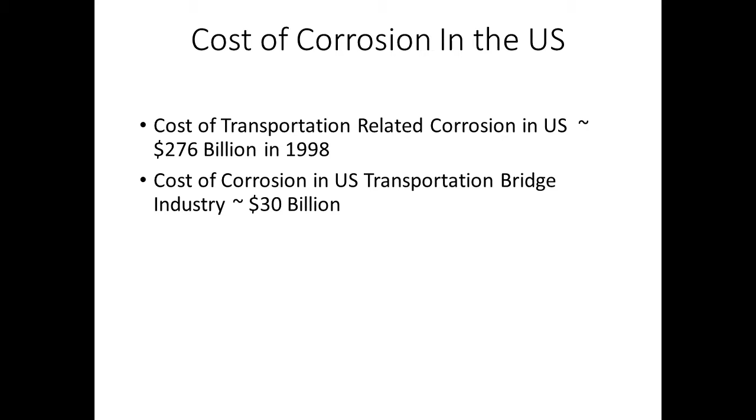It's something that all DOTs have to deal with. It's something that we in this room have to deal with all the time when it comes to preservation and bridge preservation in general. When we sat down for this scan, we had to get a scope.

We all met in DC preliminary to sit down and discuss what we wanted to get out of the scan. Basically, part of it was to determine the amount of funding the agencies could get, evaluate the practices we use for bridges, for in-situ coatings, what type of surface preparation we're going to be doing or recommending, coating option decision-making, use of performance-based contracts, performance evaluation, and overcoat and replacement of coatings. We went on and on about what we were going to do in this domestic scan.

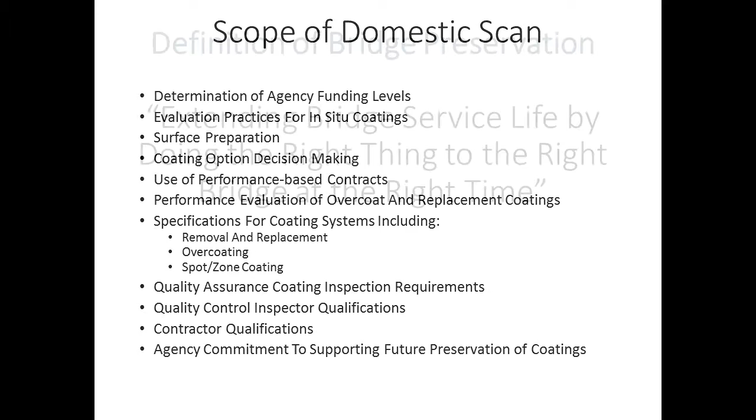These are the areas we covered: quality assurance, quality control, contractor qualifications, and agency commitment to supporting future preservation of coatings. When we talk about bridge preservation, the definition is extending a bridge's service life by doing the right thing at the right time.

In a lot of situations you'll have a bridge that might be 15 or 20 years out before you do a redeck. It could be 30, 40, 50 years out before you're doing any major maintenance, but we have a corrosion issue. So what are we going to do to maintain that structure? Part of the scan was to determine what the best practices are.

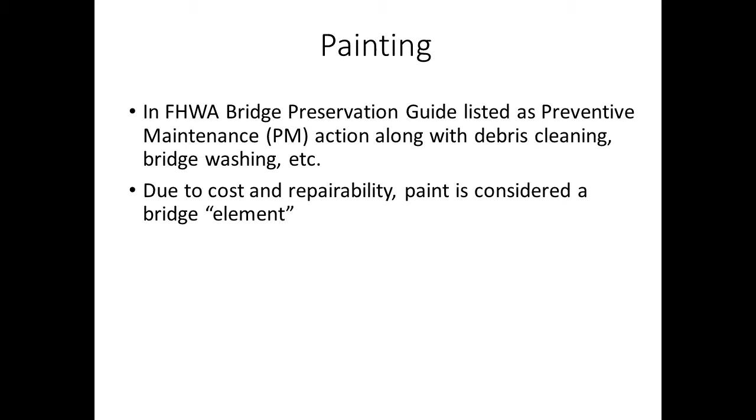When we talk about paint or coatings, in the Federal Highway Bridge Preservation Guide, it's listed as a preventive maintenance action, along with things like debris cleaning and bridge washing. But due to the cost and repairability, paint was considered a bridge element.

When we sat down with all these folks at this meeting, 11 state highway agencies had preventive maintenance programs. Six owners had steel bridge preservation programs, and they use life cycle costs for effective coating decisions.

The other issue was dedicated funding for bridge painting. How is it done? Do they have a set program? Do they have a set amount of money? Do you just put out money when you need to? When we talked about dedicated funding, the whole idea is that to have an effective program, you need to have dedicated funding.

We talked about inventory and structure condition and other specific attributes. When we started talking about evaluation practices, a lot of DOTs did different types of evaluations of the coatings in the field, but mostly they all followed and made maintenance painting decisions based on the NBIS.

This was done under two-year, biannual in-service bridge safety inspections, and coating assessment tools they would use included the SSPC Viz guides, custom photographs, tensile adhesion testers, and thickness gauges. There are a lot of different things in the arsenal that they use to evaluate bridge practice for the coatings that are out in the field.

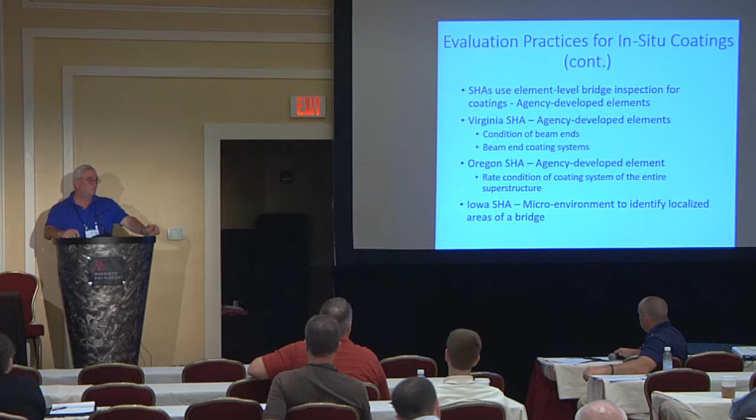For the most part, when we talk about coatings and structural steel, specifically for bridges, when you look at a situation like corrosion, what is the best method for cleaning the structural steel and making sure it's set up and ready to have a coating applied to it.

Most of the state highways specify SP10, which is a total removal, blast clean to a near white. Surface preparation varied a lot for spot cleaning and painting. In that situation, you could use hand tool or power tool cleaning, all the way up to spot abrasive blast cleaning. Most of the SHAs utilize the SSPC Guide 6 for containment. It's a very handy guide for all the DOTs to use regarding the containment systems to collect waste during abrasive blasting or hand tool, power tool cleaning.

The other thing that was noted and real interesting is a lot of state highways are moving away from overcoating work. When you start talking about overcoating an existing coating, a lot of them are getting away from it because the sheer cost of putting up containments for structures to do overcoat work is over half the price of what the job costs. So they're finding that if you do a complete blast or complete removal and paint versus an overcoat, there's not a big difference in price. So a lot of DOTs are getting away from overcoating work.

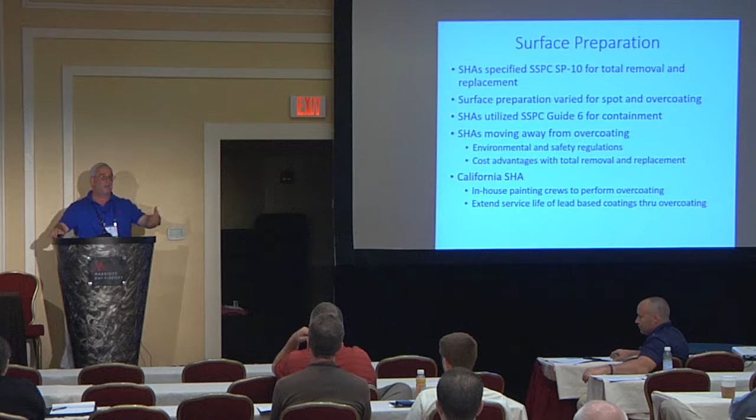But they do some overcoating because they want to extend the life of the lead coating that was applied many, many years ago. Some of you may not understand that lead is the best corrosion inhibitor out there, the next best would be zinc coating. So instead of removing all the lead, they want to try and keep it on. I thought that was quite interesting.

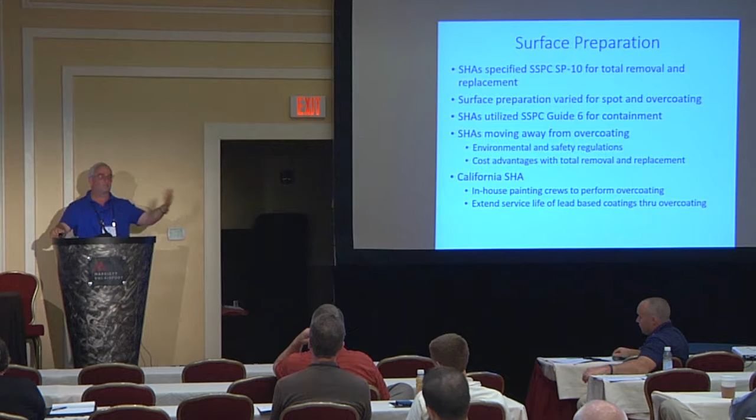Oregon uses an ultra-high pressure wash to remove pack rust. Specifically, they use this process to remove pack rust between plates. You have this especially with built-up members, bridges that have truss connections, where you get a lot of heavy pack rust and the steel starts pulling apart. They use high pressure water to remove all that pack rust, and then they coat it to keep it from having any further delamination.

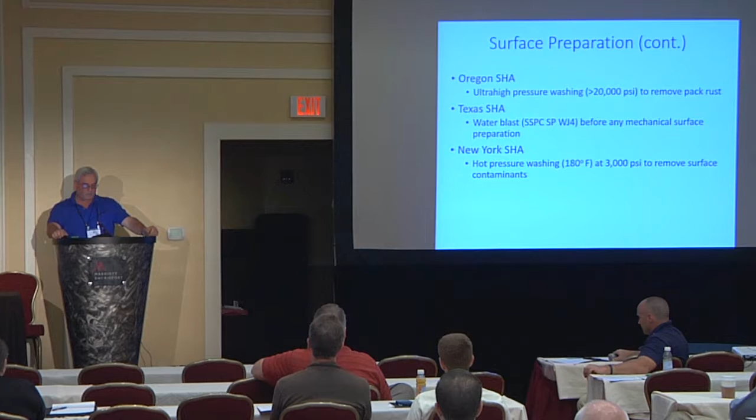Texas was using water blasting before any mechanical surface preparation was done, and they had some success with it. New York uses hot pressure washing to remove surface contaminants.

So during the domestic scan, we talked about coating options and decision making. Everybody in this room has decisions to make when it comes to their structural coatings - what they're going to want to do to protect the steel, how we're going to get the work done, and also how we're going to pay for it.

Total removal and replacement was seen to be the best. It gave us the most longevity, anywhere from 15 to 30 years, depending on the structure and its location. For overcoat, we were looking at somewhere between 10 and 20 years.

We were also looking at high performance coatings and systems out there. We have a lack of historical data on these high performance coating systems. There's a lot of new coatings coming out on the market - high build polyurethanes, and all different types of coatings, with people touting them as the best, the next best thing to use on your bridge that will last 20, 30 years. The problem is we have no historical data on any of those, so it's kind of a wait-and-see situation.

Most folks out there have seen and used 3-coat zinc epoxy urethane coatings for 30, 40, 50 years, and they have longevity and a track record. So a lot of people have decided that's the way to go. Then we talk about testing high performance, ultra weatherable coatings - using modified weathering, accelerated weathering testing, outdoor exposure, and different top coat colors. That was one thing brought up at the domestic scan - top coat colors and fading.

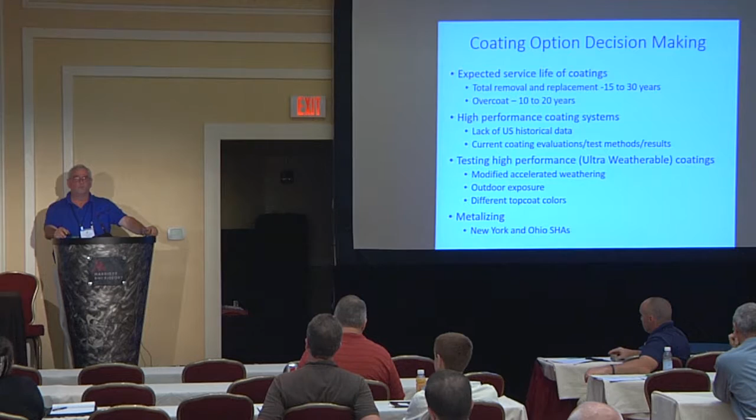One of the other things discussed was metallizing. New York and Ohio had done some metallizing work. That's something on the horizon that could be of interest to certain locations for certain DOTs, but metallizing is very expensive. When you talk about total removal for an average overpass bridge, you're looking at anywhere from $12 to $15 a square foot, depending on the location. In New York, it's probably more like $40 to $50 a square foot. But when you start looking at metallizing, you're looking at average areas of $40 to $50 to $60 a square foot, depending on the location and the size of the structure.

During our talk at the domestic scan, we talked about use of performance-based contracts, specifically warranties. As I was introduced, I work for Maryland State Highway Administration. We use warranties and find that it works very well in making sure a contractor does a job right. Maryland and Michigan use 2-year condition performance warranties. Oregon uses a 3-year. The Golden Gate Bridge District has a 5-year on contractor work for labor and materials.

When it comes to the 2-year warranty, we require a separate bond in Maryland. That bonding is to make sure the contractor's work and performance lives up to the expectations of what we paid for. So we require a 25% total amount bond for the work they've just done. Oregon, on the other end, requires 90%.

Both are requiring, for warranty work, any type of surface preparation, platform containment, any type of pack rust removal. It has to have some type of performance guide to give to the contractor for what we're requiring them to do.

Then inspection frequency and enforcement language in a spec. Of course, everybody has their own specifications, but when you talk about coatings and the work that's going to be done by a contractor, you have to make sure you have language in there that you can hold them to. It's really important that the language you put into the contract has enough teeth so that you can get done what you want to get done, and get it done properly.

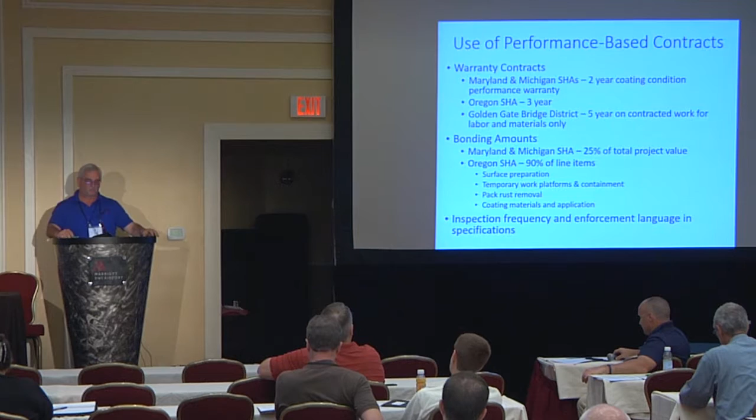A lot of the SHAs are using AASHTO's NTPEP and NEPCOAT programs for their coatings. Some SHAs perform in-house testing of coatings, testing the chemical compounds and characteristics. Texas and California actually have in-house formulations of their own coatings that they specify out on bridges.

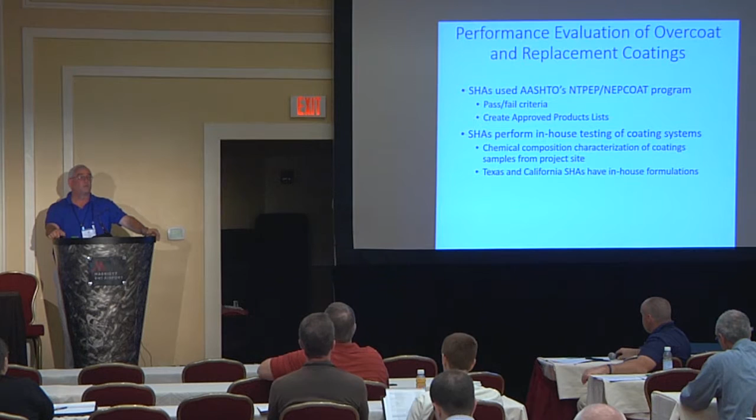When we talk about specifications for coatings, there's a long list here. I'm not going to go into every single one of them; you've probably all seen them before. The whole idea is that when you have a specification, you need to make sure you touch on all the points required for your specific job. Most bridge work is bridge work, so you can get a boilerplate spec and put it out there, but you also need to address the areas which are going to be different.

Those areas need to be addressed in the specification either as special provisions or inserted into a standard specification. When doing your specifications, make sure you get everything you need into that spec. We require in Maryland, for instance, that all contractors be SSPC QP1 and QP2 certified. We have that in our spec. Some state agencies don't. It all goes back to the situations you've run into in the past. We've found that specifying QP1 and QP2 really works for us. Some of you might find something else.

The biggest things are making sure you have your material specs, what kind of containment you want, qualifications for the contractors, any consultants that might be on the job site, your record keeping requirements, hold point inspections, and stripe coating. Stripe coating is a real big issue in certain areas.

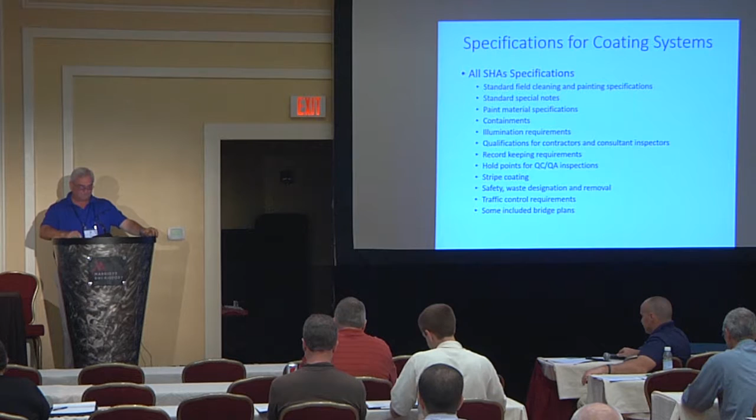So everybody's a little bit different for their needs, so just make sure whatever your needs are, you put them into your spec. Also, you need to worry about safety, waste designation and removal, because a lot of the material coming off these bridges probably contains lead. Any traffic control requirements, and some might be included in your bridge plans.

The next thing I'd like to talk about is quality assurance coating inspection requirements. Very important - how do we make sure we get the job done that we want? We found out at a domestic scan that this is one of the main issues, other than specifications and material selection, that the DOTs have a lot of control over, and it's the coating inspection.

For instance, one SHA had in-house personnel perform all QA inspections. Well, that's great, but a lot of DOTs don't have that kind of funding and money to have in-house people doing that kind of work, especially if you've got 5, 6, 7, 8 different jobs going on out there on the street.

5 different state highway administrations had consultants for QA inspections, and 6 of them had a mix of in-house and consultant for QA inspections. When it comes to QA inspection, the most important part is making sure that the inspectors you have, whether in-house or consultants, have the correct training, education, and experience to perform these inspections.

Because this is the person out in the field making sure you're getting what you're paying for. So in this situation, we came up with a minimum qualification of at least a NACE CIP level 1 or an SSPC BCI level 1, and some state highways specified even higher. I believe Virginia requires a NACE level 2 or a BCI certified.

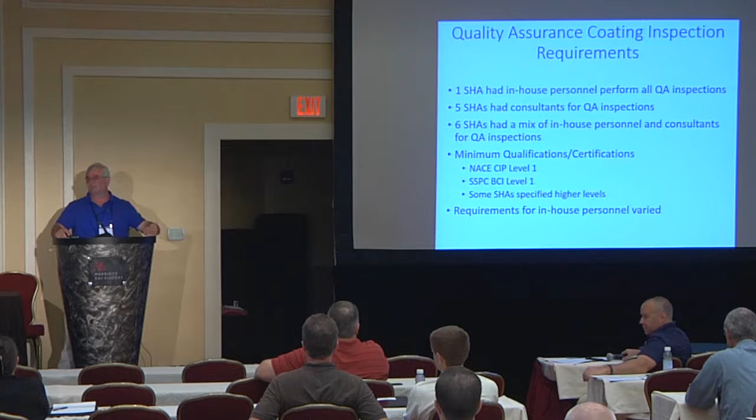On the QC training, for the contractor qualifications, that's another thing. When you talk about SSPC and QP1 and QP2, which I'm very familiar with - I used to be a painting contractor for 14 years, and I was chairman of the SSPC's painting contractor certification program - we dealt with these contractor qualification issues.

Having a contractor out on the job site with personnel having the right qualifications to do the job right is really important. We also agreed in a domestic scan that having that and making sure the contractor's personnel were qualified matters. Maryland actually has it in its specification, and it's something I would recommend to all DOTs to have in their specification.

The QC inspection training for the contractor's personnel is paramount. All state highways that were there required some kind of training before assigned to a project. Training of in-house personnel was on the job. Industry-based training was okay to a lesser extent, and then there was in-house instructor-led training, which was also good.

The whole idea here is to make sure the contractor's personnel have been trained, because they're the ones finding the things they're supposed to find. QA inspection is QA - it's quality assurance. We're not out there to do the inspection for the contractor.

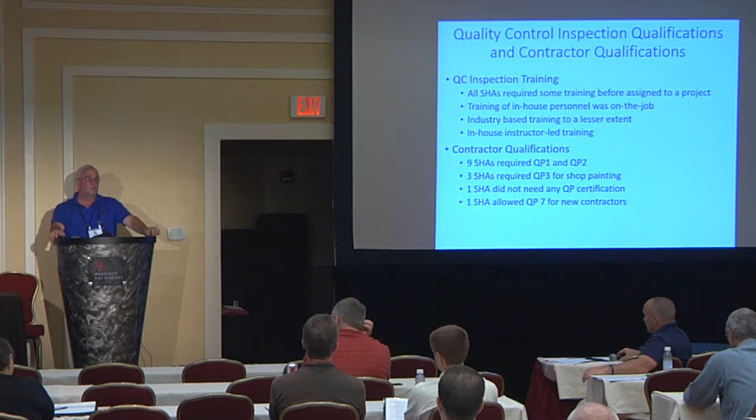Agency commitment to supporting future preservation of coatings - asset management. I'm going to be speaking of these. All of you folks have your own niche of what you do at work.

But when we talk about commitment, we talk about what kind of dedicated group and personnel you have for coatings at your DOT, what your overall maintenance budget is on a system level for coatings for your structures, and your bridge management system - your Pontis, your network level trends, and your bridge needs based on system-wide constraints. Then bridge maintenance management systems, your project level needs, and establishing performance measures for maintenance painting.

State Highway has a program that we use that I'll be talking about later on. But here comes the meat of what we did at the domestic scan and our recommendations.

We have a report that's going to be coming out in approximately, I'm going to say, at least 2 months. The summary report right now is being reviewed as we speak, so hopefully the final report will be out in a few months.

Some of the recommendations we had from the SCAN team are dedicated bridge painting funds. You guys in the DOT world need to dedicate funds for coatings. If you don't already do it, you need to do it.

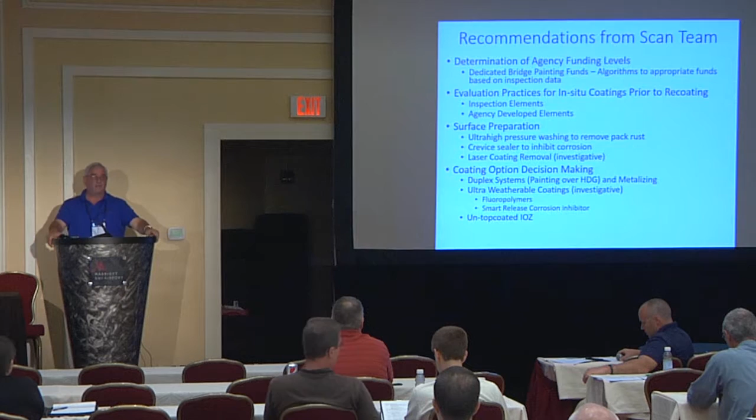Laser coating was something that was brought up at the end that might be something in the future, probably way in the future. And then coating option decision making.

We talked about duplex systems and painting over hot-dip galvanized. That's something personally I'm not a big fan of, but in certain situations when you want to have a color and you need to paint over hot-dip galvanized, there are systems out there that you can do that with.

Ultra weatherable coatings, that's another thing that people are looking into. But when we come to recommendations...

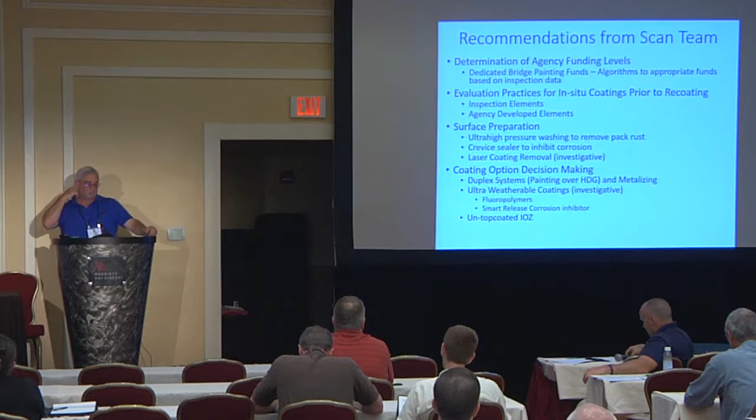The other thing was using performance-based contracts. We've come to find out at Maryland the use of a 2-year warranty doesn't really increase the price all that much. Actually, it doesn't increase the price at all. Two years—if a contractor does the job right, it should look good in 2 years. We shouldn't have any problems.

But with a performance-based warranty in place, if the contractor didn't do his job properly and we didn't catch it, when we do our 2-year warranty inspection, we'll find it, and he'll be required to come out and fix it. We have a mechanism to make him do that, because if he doesn't come out and fix it, we have a bond we can go back to and get the money to have another contractor perform the warranty work.

Which, in my 8 years at State Highway and then 14 years as a bridge painting contractor, I don't know if State Highway ever had a situation where they didn't have a contractor come back and do the warranty work that was required.

And then your performance evaluation of overcoat and replacement coatings. Incorporate colorimetry into testing protocols, modify national test protocols.

When we talked about overcoating, I was talking to a gentleman outside. In our domestic scan meetings as well, it's come to find out that most overcoating work is not being done anymore, or it's being done on a limited basis. When you talk about installing containments and whatnot, it gets very expensive. We've seen the same thing at Maryland, where we're paying almost the same amount of money to have a bridge overcoated versus completely cleaned and painted. So we don't really do any more overcoat work.

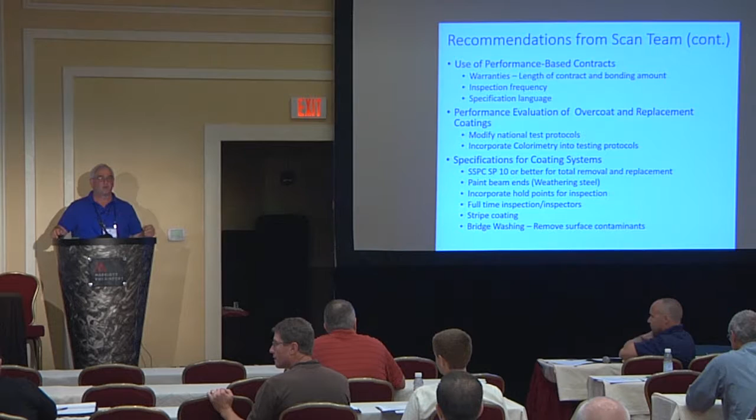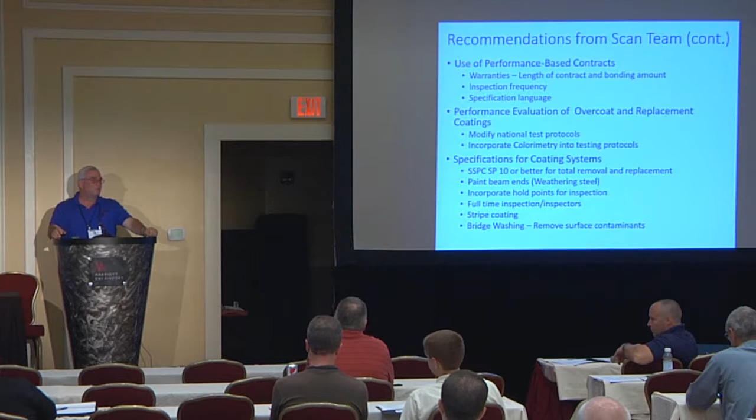Bridge washing to remove surface contaminants. There are a lot of restrictions now. Many, many years ago, Maryland State Highway Administration used to pressure wash all its bridges as part of its maintenance program, and part of that process was to remove surface contaminants. Well, it's very difficult to do that nowadays in regards to environmental concerns, because of the issue with our environmental department in Maryland. You have salts, oils, grease, and we have the Chesapeake Bay, which is not that far away. So we no longer wash bridges anymore.

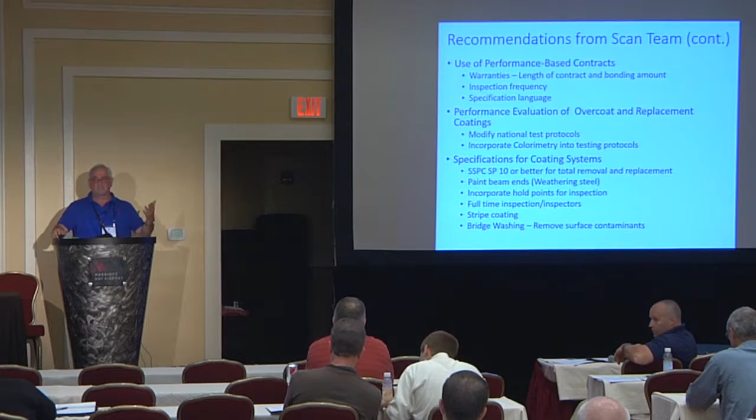Some states still do that. Whatever it might be, it's real important just to maintain your structures.

And then quality control inspection qualifications and the contractor qualifications. Our recommendation is to specify at a minimum a NACE CIP and/or SSPC BCI. And the recommendation was also to recommend that all your contractors are QP1 or QP2 certified.

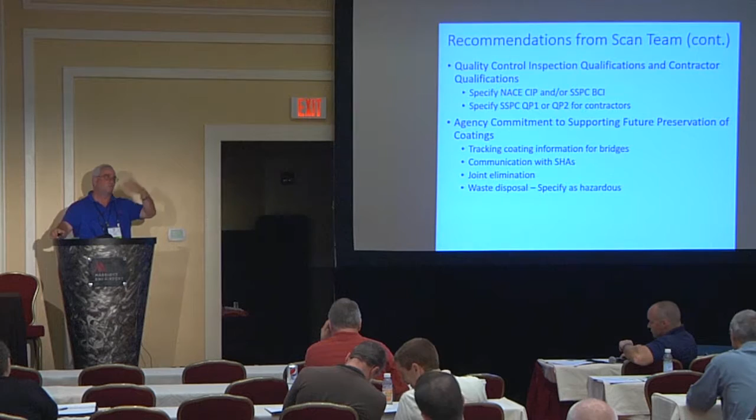The agency commitment to supporting future preservation of coatings. Tracking the information is paramount. You painted a bridge over here today, you need to keep track of that information down the road 10, 15, 20 years from now. Communication with different SHA organizations.

Networking. So with this program, that you're here today and this past couple of days, is talking to each other and finding out what works for you and what doesn't work for you, and trying to glean information from other folks. That's what these programs are about, especially having this type of conference.

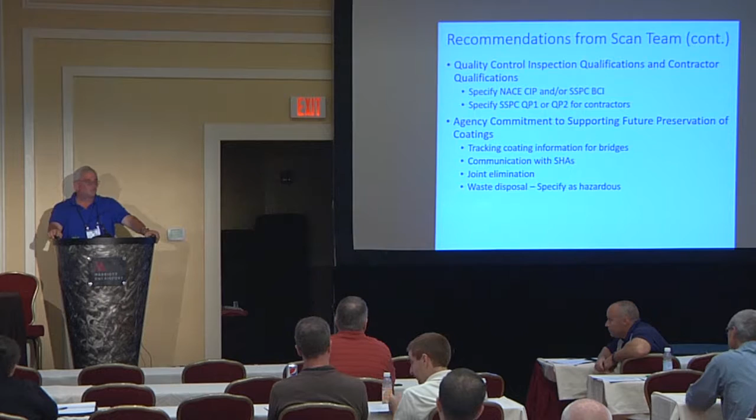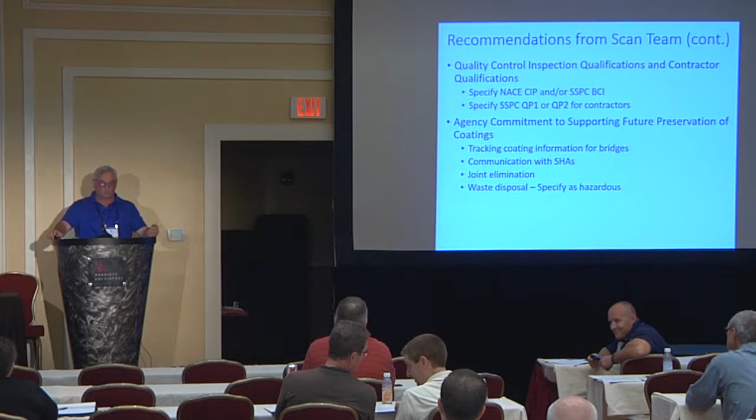And then we had one person in Virginia who let us know that they are trying to reduce or eliminate all joints on bridges. It sounds kind of far-fetched, but they're working on a process to try and eliminate the joints, because, of course, you all know where our heaviest corrosion is located at. Most of it's located at our bearing and beam ends where they're joint locations.

And waste disposal, specify as hazardous. Even if you're cleaning and painting a bridge that had a zinc coating on it, it's just easier to dispose of material that way, as hazardous.

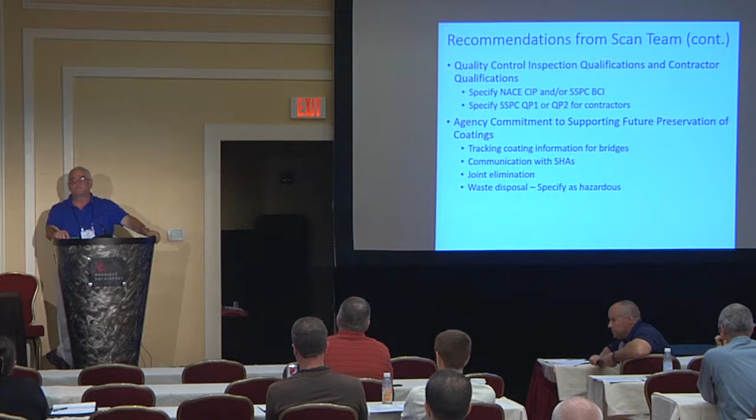You have to remember as a DOT that you have responsibility for any waste that you generate, cradle to grave. That means you own it from the time it comes off the bridge till it goes in the landfill, and while it's in the landfill, you still own it. So it's better just to specify it as hazardous.

So I don't know how much time I have left. But any questions on that part before I go into the next one?

I'm confused when you said that—I mean, the right thing to do is to dispose of the zinc as hazardous waste because it is hazardous. The environmental rules state no heavy metals and deleterious materials. So zinc is as hazardous as lead in relation to the environmental rules. And in Europe, they're doing research now, finding it's almost as hazardous to people's health as lead is. So that's a very good recommendation, to handle it as hazardous waste because it is one.

Well, a lot of DOTs and a lot of contractors are doing TCLP analysis to determine whether the waste stream that they're generating is hazardous. And some of them are coming back non-hazardous, even though it was a zinc product. So what we decided in the domestic scan was that you should classify all the waste coming off these steel structures from cleaning and painting as hazardous.